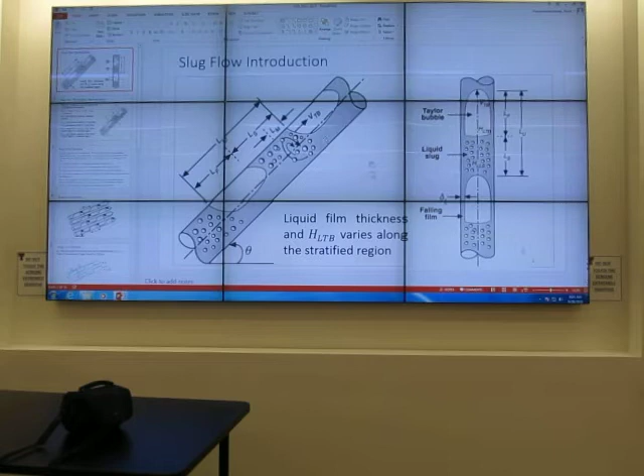The first step, we will have to be familiar with the parameters, because we will use them a lot, the definition of the parameters. And I would like you to keep in mind that the objective of all these things that we are studying is to get the pressure drop, so that we can size the subsea pipeline, which costs a lot. Subsea pipeline, multi-million dollars, it's not cheap. Horizontal well, subsea riser. So at the end, everything you want to do is calculate the pressure drop. Of course, the exam will be about calculating the pressure drop. Definitely that kind of question will be in the exam.

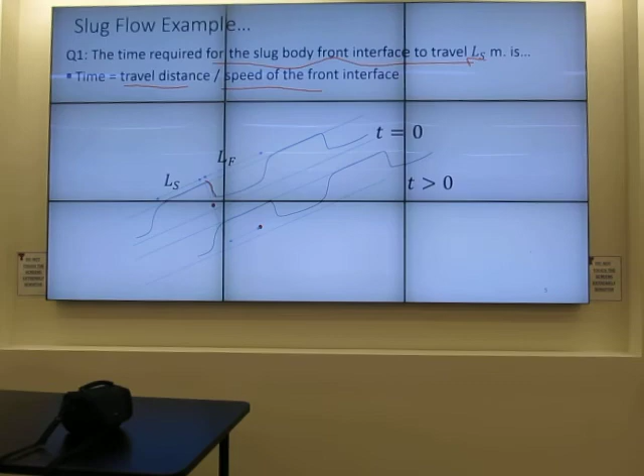This is not true if we stay close to the boundary between slug and elongated bubble flow. In elongated bubble flow, we don't have fully mixed flow like this, correct? So in elongated bubble flow, it mixes a little bit, but near the tail it's not that fully mixed.

Oh, another example is, let's say we do drilling and we want to do a cutting transport calculation. If you want to know if your cutting will move all the way up or accumulate at the bottom, you can do this kind of analysis, right? Or how long does it take, or what is the slip velocity between cutting and the fluid. Okay, we don't need to do integration, but if you want to, we integrate V dt, which will be distance. Good, integration of V dt is distance.

Velocity will be the actual velocity of the particle. See, when we think about what is the velocity of the particle inside the slug body? That is the same as the velocity of liquid inside the slug body, for the case that there is no slip. So a solid particle that has no slip stays inside the slug body. It moves at Vs or Vm.

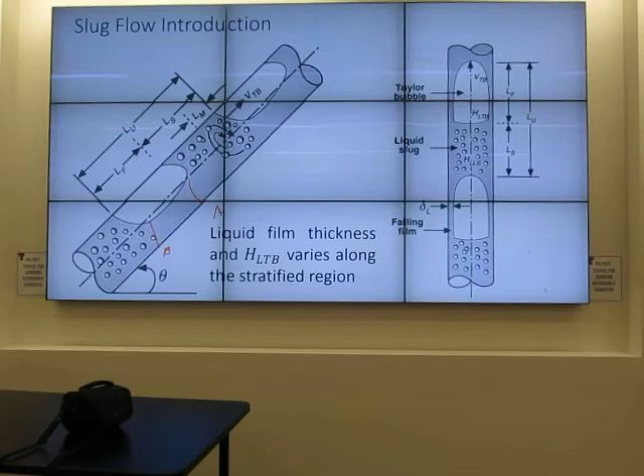So the relative velocity will be VTB minus what, Arya? Yes, of course, correct. Okay, VTB minus Vs. Okay, question 5, Raymond. That moving observer in question 4 will see the liquid inside the film travel backward at the speed of what? VTB minus Vs? So VTB minus VF, velocity of film. Velocity of liquid inside the film.

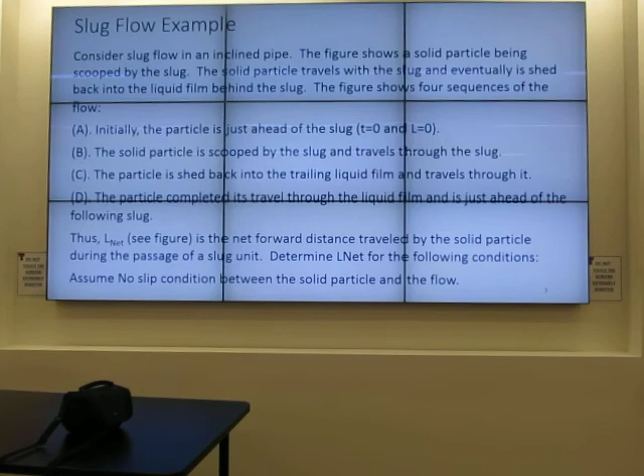We have never defined VF yet. What do we use, or what does your textbook use? VL, Taylor bubble? TB? How about VLTB? Let's go back. VLTB. So in the Taylor bubble zone, there's gas in the gas pocket. That is VGTB, right? Liquid inside the liquid film is VLTB. No VF. VF, Shoham uses it as some other velocity. Okay.

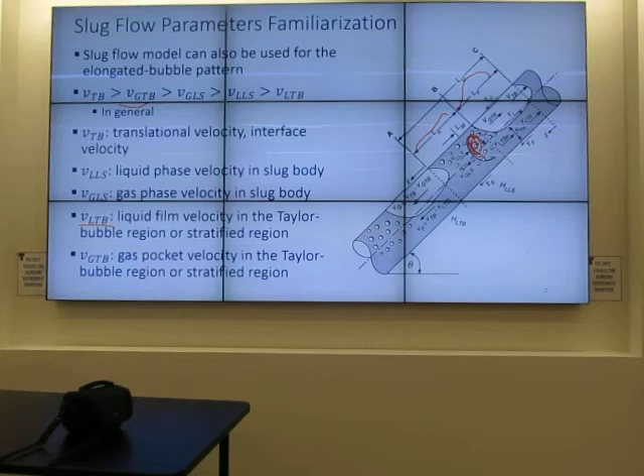So the moving observer will see the particle or any liquid inside the film move at the speed of VTB minus VLTB. So that is the speed. Jiasheng, the moving observer will see the particle traveling, shown on page 1 or the previous slide, as the particle moving backward from one front of the slug to the front of the next slug. Right? The moving observer sees the particle move from one front to the next front.

Good? Okay. The time required for the particle to move through the slug body for the moving observer is how many seconds? You need a hint? You're good. It's LS divided by... Length over velocity will give you time, right? Okay, go ahead. VTB minus Vs. Oh, okay. VTB minus Vs. Yes, these ladies know it. Yes. So time is length divided by velocity.

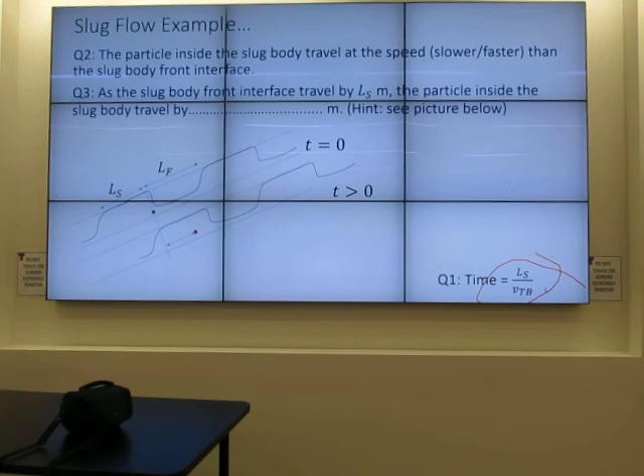So when we add time together, we do the integration of dt, right? From wherever the start point is to the end point. Okay, you see picture C. The start point is where the particle is at the tail of the slug body. The end point is when that particle reaches the next slug front. So we want to do the integration of time, dt, from the point in picture C to picture D. Good? C to D. Will the velocity be the same at each location? No.

Relatively, like along the... VTB minus VLTB. So imagine that film moves, right? The film doesn't move, the interface moves. Mass inside can move backward. That's the point that I want to say. Film doesn't move up at the same speed of the interface.

So the interface moves faster than the film, and the liquid particles inside the film lag behind. And sometimes liquid inside the film moves forward. Not sometimes, some location close to the tail, it moves forward. Away from the tail, it can move backward, especially for upward flow.

Okay, so we have to do integration of dt, right? And dt is dl over VTB minus VLTB, and we do the integration, right? Initially, we want to do this, integration of time to get the total time. So we integrate dt from picture C to picture D. So we explain more on what is that dt.

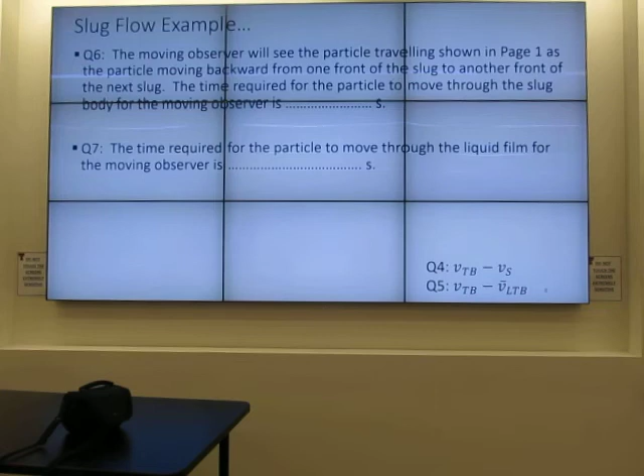Okay. Question 6 is about the time that the particle stays inside the slug body, right? That is the time experienced by the moving observer. Question 8 is the time experienced by the stationary observer. Are they the same? Which one is longer? The stationary. Longer.

Okay. So if I move at a certain speed, that clock will move slower. Or if I drop, let's say I drop this phone, you stay still, I move, I will see the same event happen in a different way. So I will see this phone drop a little bit faster, and you will see this phone drop a little bit slower. Is it like that? Or the other way around?

That is only for the case where velocity is close to the speed of light. We are not going anywhere close to the speed of light. If it's close to the speed of light, you move faster, time will expand a little bit. But we are not at that. So moving observer and stationary observer experience the same amount of time. The time that particles stay inside the slug body for the moving observer is the same as for the stationary observer.

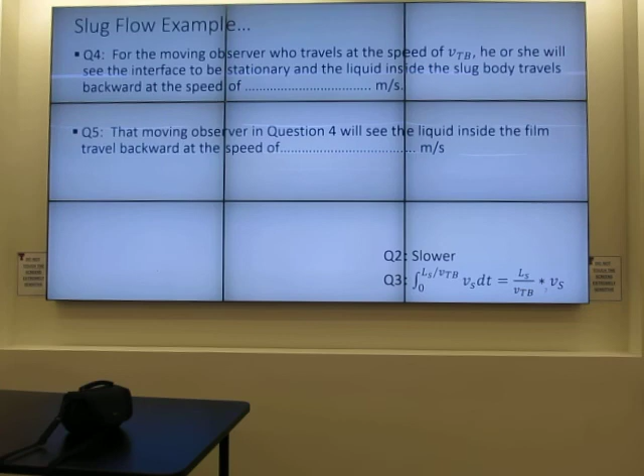But for the case where we don't have to do integration, you understand this, right? Length over relative velocity equals time. I think we have to do the integration not to LF, but to that distance. So distance from here to here. It's just that distance, not the whole LF.

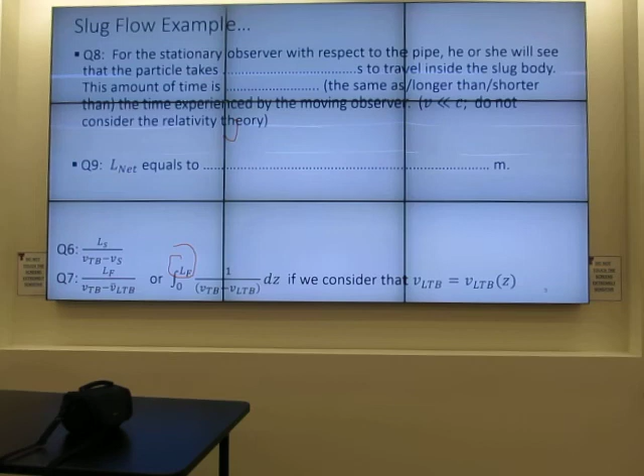So this part I will do some correction and get back to you later, okay? The integration form is not right. I notice it now, but the regular form is fine. For this part, George, how much is your L net?

I guess you just add the distances from each. Okay, add distance together. So distance number 1 will be velocity multiplied by time, right? Distance number 2 will be velocity multiplied by another time. Add them together. Time number 1 will be the time that the particles stay inside the slug body. Time number 2 will be the time that the particles stay inside the liquid film, right?

So when it stays inside the slug body, the time is Ls over VTB minus Vs, right? That is the amount of time. Answer for question 6 and 8. The time that it stays inside the liquid film will be Lf over VTB minus VLTB. That is the amount of time.

When it stays inside the slug body, it travels forward, not backward, right? For the stationary observer. When it stays inside the slug body, the particle travels forward at the speed of Vs, right? When the particle stays inside the liquid film, the particle moves forward at the speed of

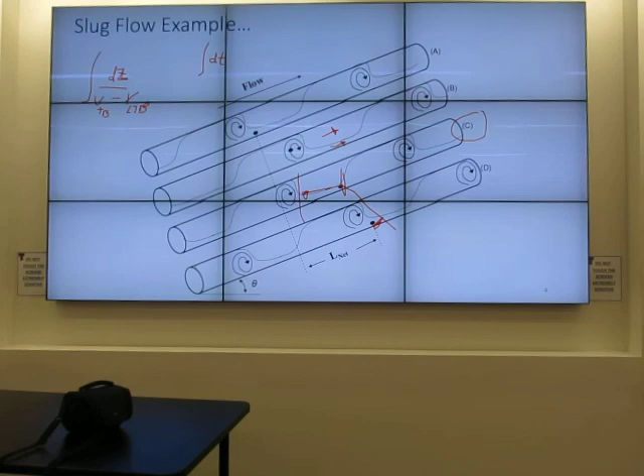L net equals LF over VTB minus VLTB multiplied by the stationary observer speed, which would be VLTB, plus V mixture multiplied by LS divided by VTB minus V mixture, multiplied by something. So that's it, right? I think I have

See, the integration form is still wrong. The limit of integration is not right. But this one is correct. Yeah. Okay, this one I will make a correction and get back to you. This one is correct. So it's the actual velocity that the particle moves forward, which is Vs when it stays inside the slug body, right? Multiplied by the amount of time when it stays inside, plus velocity multiplied by time.

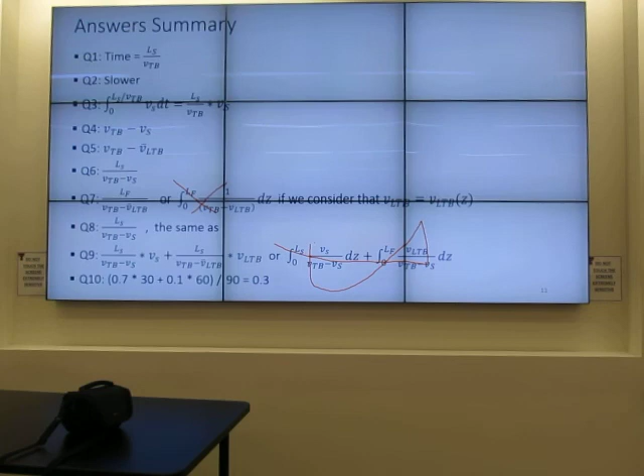Okay. Do you use average on the other side as well? Vs. No, for the VLTB average, shouldn't they also be multiplied? Oh yes. This should be average. I'll do correction too. So that's the answer, except the integration part, that part is not right yet. L net. Yes, Vega. Is it LS or LF in that expression? Oh, okay. Another typo. So this should be film length. Film length. Okay, I'll do the correction and update again.

Quick question. Yes. Why is the integral distance not equal to that? It's wrong. Why is it wrong? Why not range from 0 to LS and 0 to LF? If you do that integration, it's too long, because L net is shorter than both of those added together. I did it wrong. I'll redo it and give it to you later.